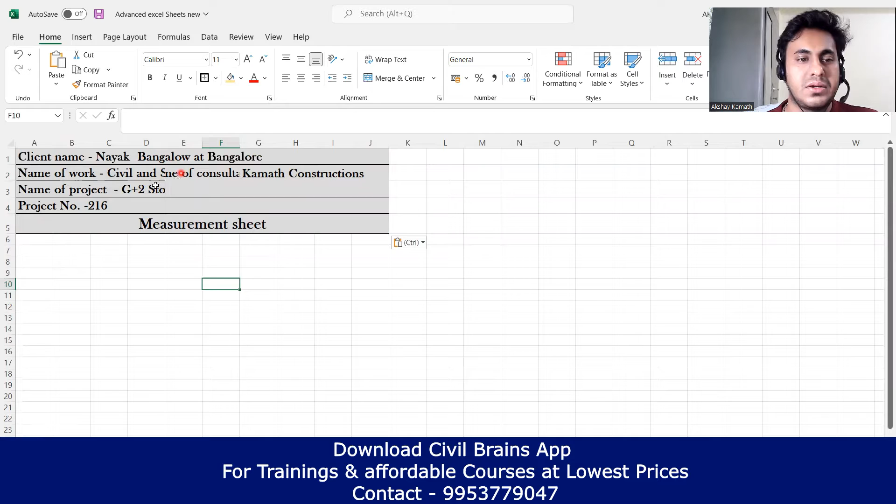I'll say Control C. I'll go to the new one. I'll say Control V. So everything will come here. You just have to pull it now. This part, then this part, and this part. Try to pull it so that it looks good. Yeah, I feel now it's okay. This much part you're supposed to do. Up to measurement sheet I've done.

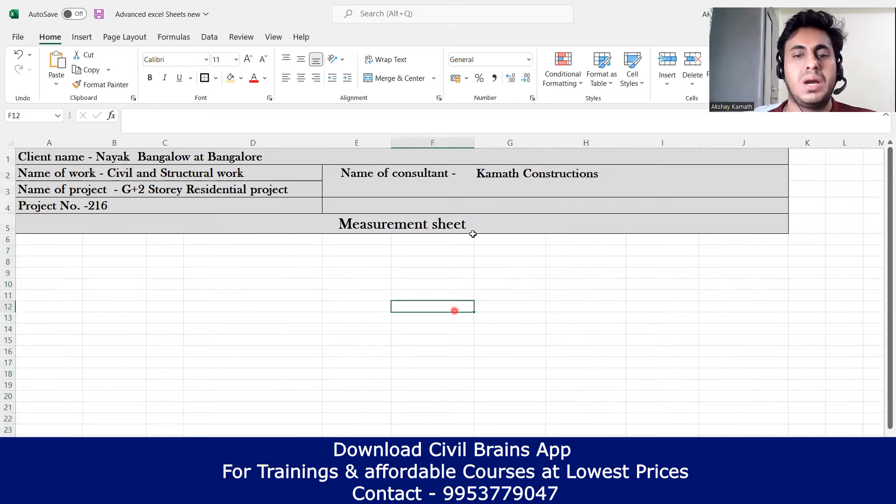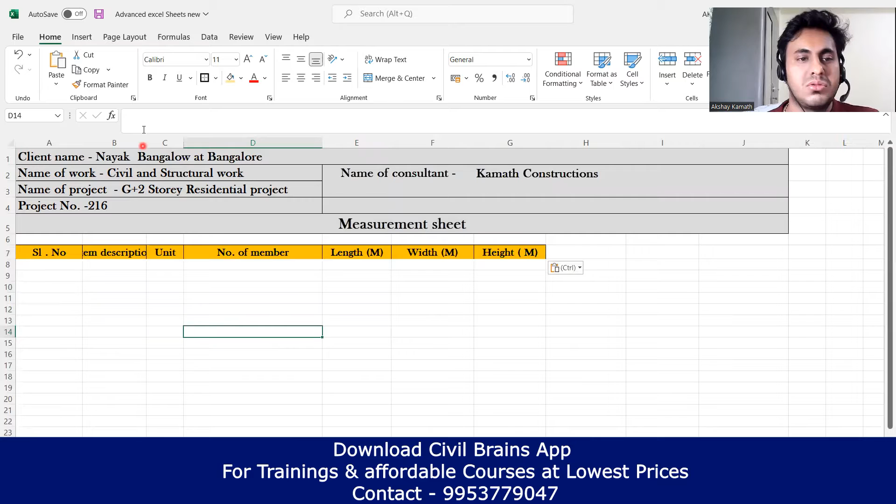So after that, you need to write down the same thing like you were doing before. Serial number, item description, unit, number of members, length, width, height. Up to here, it's the same thing. So I'll copy the same thing. You also can copy the same thing like what you have done. The quantity and total quantity is not required here. So this I need to drag a bit. Item description, unit, number of members, fine.

Now since we are finding the brickwork quantities, here we need to take care of a few things. One is you need to write area without deduction, then area after deduction, and total volume after deduction. Here you don't require quantity, total quantity. First, area without deduction, I'll write here. I'll tell you why it has to be done. This is area without deduction.

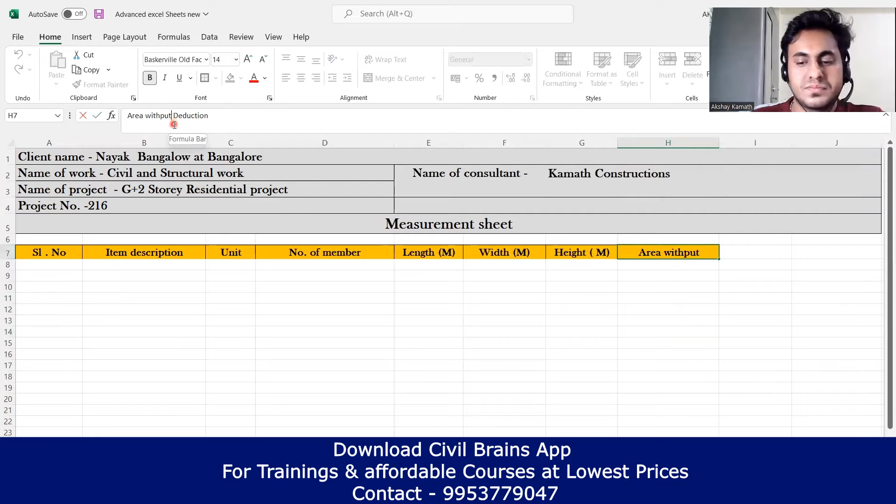So area without deduction is done. You can wrap the text also. This looks good. Next is area after deduction. One is without, next is after deduction. Wrap the text. And the last one is total volume, because here brickwork quantity we will find in volume. Total volume of brickwork. Make the brick spelling correct. Yeah, so total volume of brickwork.

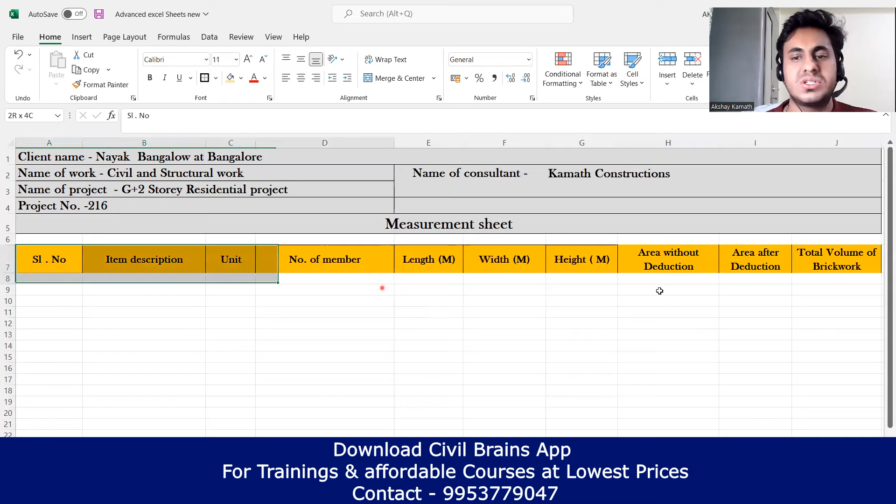So everything is good. Now you just select everything and give all borders so that every border will come. Now it looks good, right? So it's matching to the one I've done. So what you're supposed to do first, now I'll tell you.

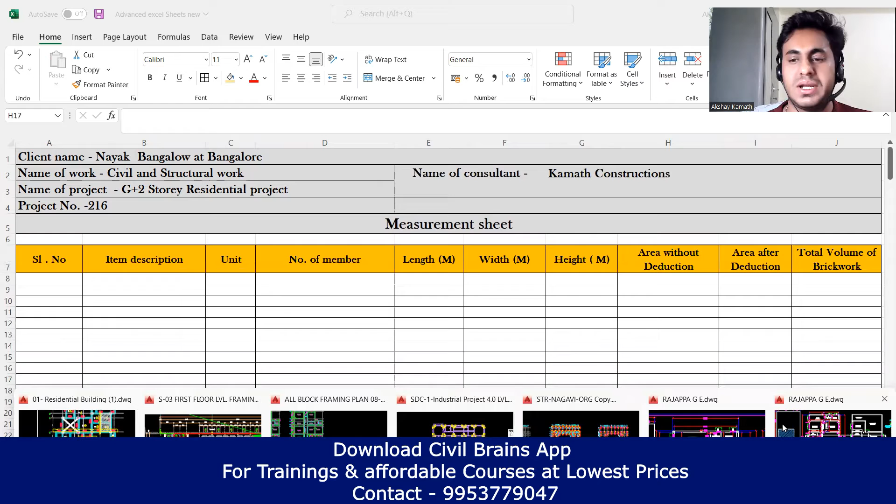Now for this particular thing, I won't take the same building which I had done for the quantity estimation, because that building will take a long time. That is why I've given one more building, which I'll be explaining, and I'll explain how to take out the quantities for this entire building. You can take the previous building as an assignment, but for your understanding, I'll teach on this so that it is easy and I can cover everything.

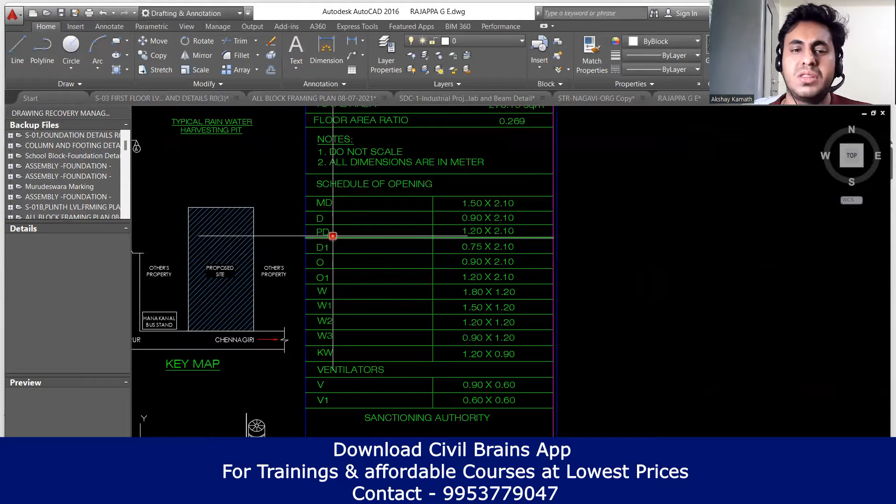And then you have a window everywhere. And if it is a kitchen, then you have a kitchen window. KW stands for kitchen window. Now the dimensions for the window will be given here. You can see MD stands for main door. This is the size of my main door. This is for door. PD is for puja door. D1 is door, which is 0.75 breadth, and height of your door is 2.1.

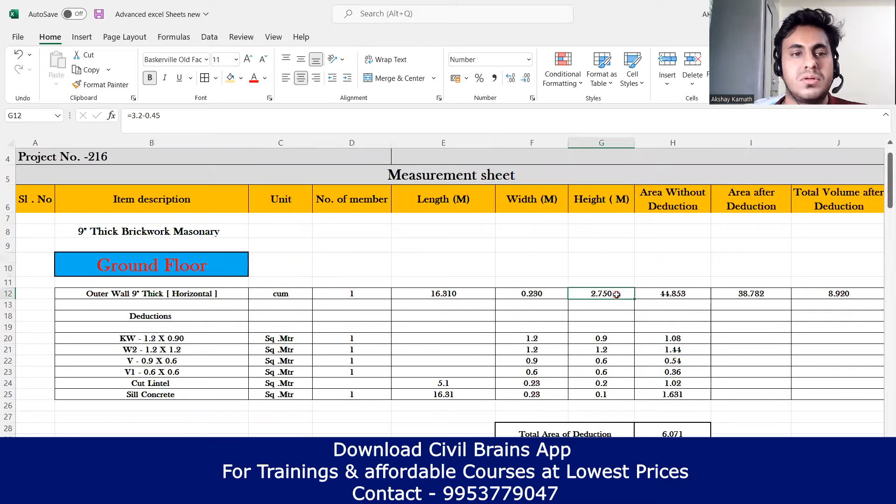Now I'll go with the ground floor portion. This includes the ground floor and the first floor. This particular thing is my ground floor.

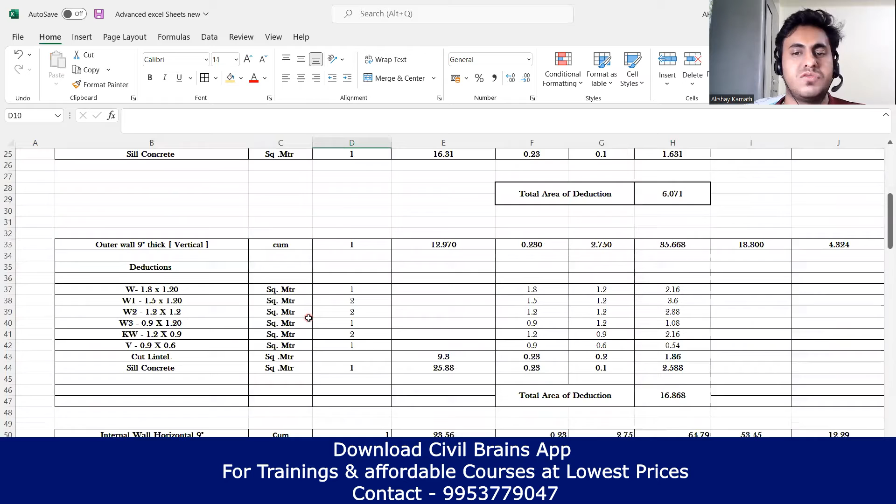Okay, first floor. Fine. I have taken it separately, the ground floor and the first floor, not an issue. Only the ground floor part I'm explaining now. So again, what you can do is come here and write it here, ground floor. You just have to write ground floor. Then give a color to this.

So after that, what are we supposed to do? You have to write this. First you write outer wall 9-inch thick horizontal. Come here and write outer wall 9-inch thick horizontal. Units will be in cubic meters, so write cubic meter. Number of members will be only one. Okay, this much is understood.

Now come to the length portion. So how do you calculate that? Up to here you are done: outer wall 9-inch thick, units in cubic meter, number of members is one. Now we'll find the running meter of this first. How we are supposed to do that, I'll explain here.

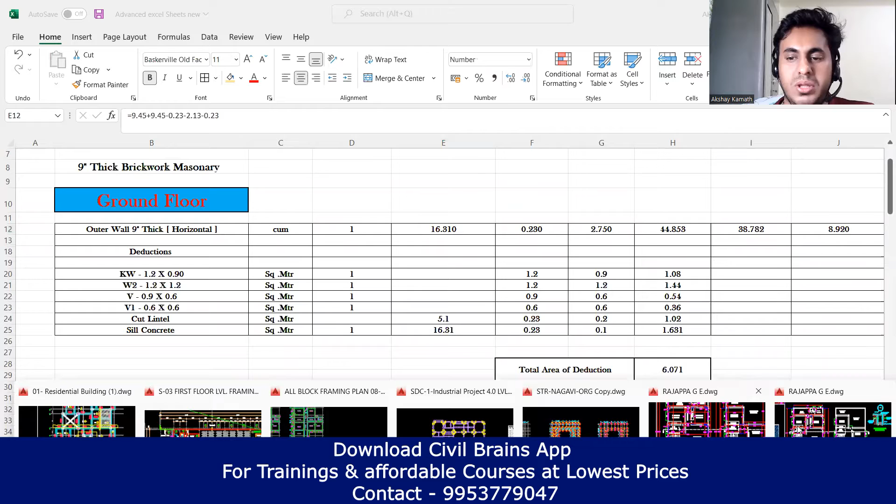So see, I'll go to the drawing part. Horizontally I'm taking. So where is your brickwork happening? This entire thing. Always brickwork will happen from column inner to column inner. So what is the distance from this column outer to this column outer? It is mentioned 9.45. So in the Excel sheet I'll write here 9.45.

So equal to sign, bracket open 9.45, plus. One horizontal is done. Now again come back here. This part I have covered. Horizontal only I want. Again here also I want, right? Your brickwork will happen here. Do you agree with me? This entire portion your brickwork will happen. Is it correct? Slightly it is incorrect.

Why? Brickwork will not happen in the entire portion. Brickwork will happen only from this column outer to this part. Why? Because here your main door is coming. When you're learning brickwork, you need to imagine. Since your main door is coming, that portion will be open, full height. So I'm not considering this particular length because there is no brickwork happening.

To put it in a better way, I'll show you one example. See here, this is that portion. This is your brickwork opening. My main door is coming complete height, let us consider. In that case, I have not taken the complete length. Only this length I am taking. Whatever length the door has, I am deducting that.

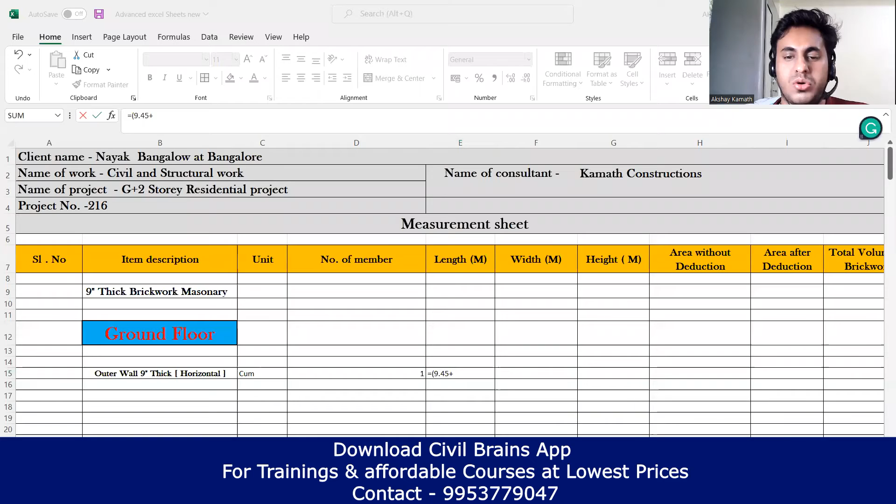You're getting my point. I'll go back to the drawing to make you understand. See this complete wall, this is main door, so here this will be the opening part. Your column will come here, but this entire portion will be open. You don't have any brickwork, so I'll not consider this length. The length from this column outer to this column outer is 7.32. So in the Excel sheet I'll enter 7.32.

Let me see what is there here. Yeah, I'll tell you how it has to be done. Okay, come. Anyhow, I'll explain here only.

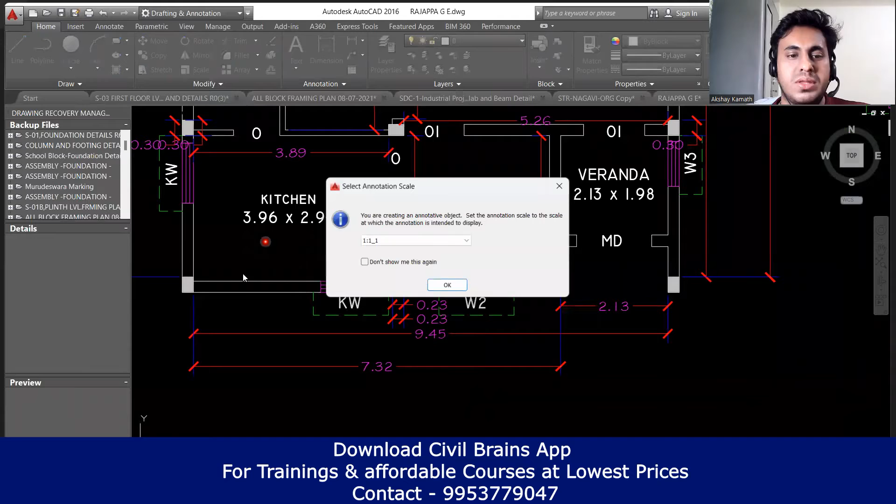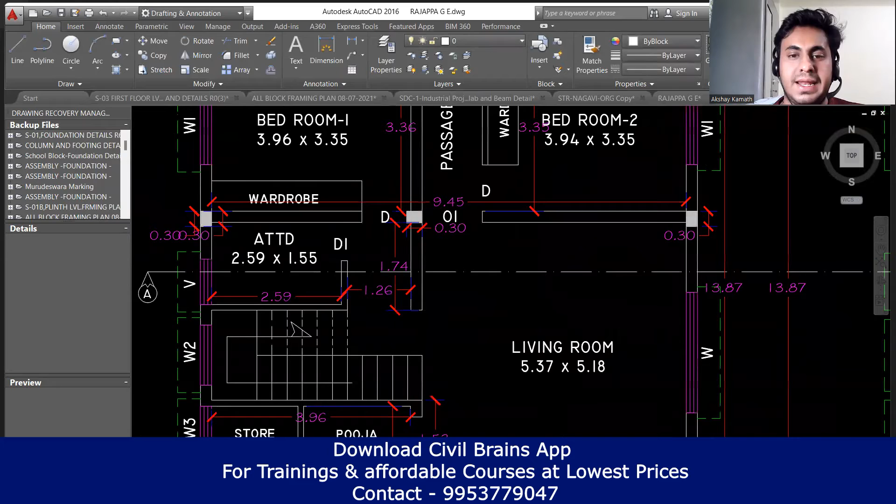See, here I've written 9.45. Why? I've taken 9.45 completely first, and then I removed that. From this outer to this outer it is 9.45. So in the Excel sheet, I've taken 9.45. Now, if you observe the drawing, this portion I told I need to deduct, I'll deduct it later. Don't worry.

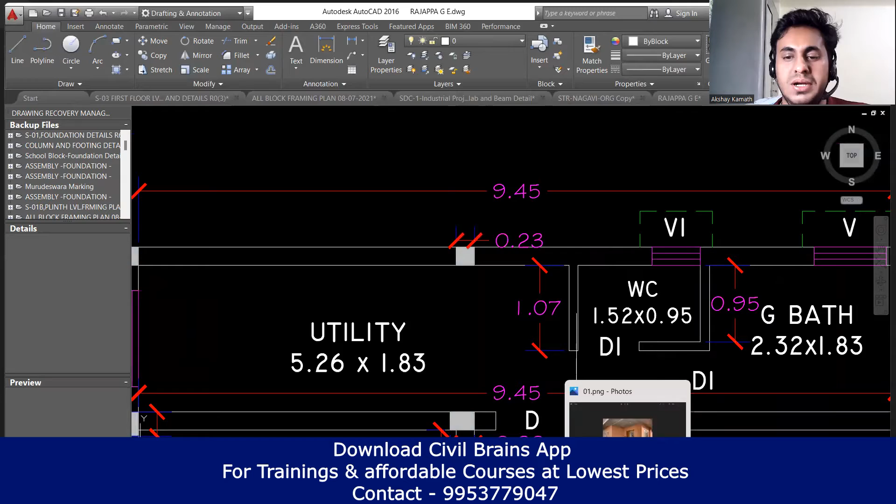Now, is your brickwork happening in the complete 9.45 meter length? No, absolutely not. Because in between, you have this column coming. Wherever there is a column, you'll not do the brickwork there. Very simple. For example, this is brickwork that has been done; you see there is a column coming. That means in this portion your brickwork won't happen.

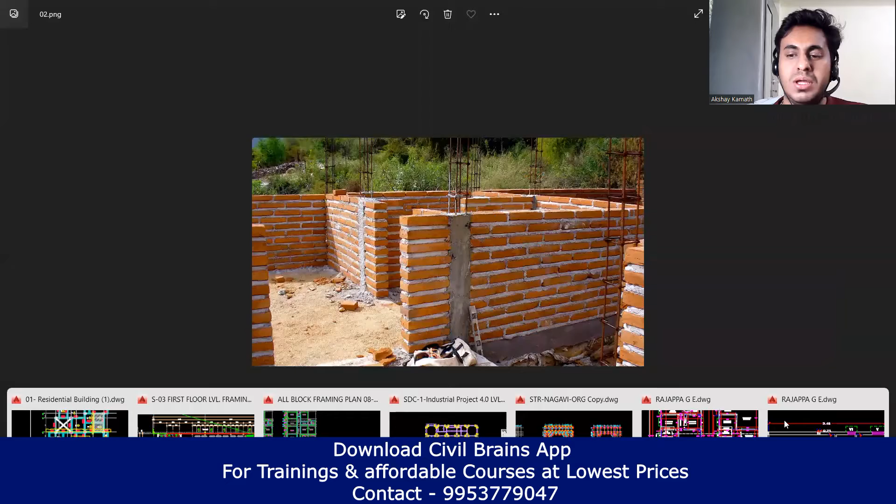That amount, whatever length we have, this I need to deduct. Very simple. So same thing I'm doing now. Okay, so here what is the width of your column? It is 0.23. I've taken a dimension from this column to this column. It is 0.23. So I'll go back to the Excel sheet. I'll deduct minus 0.23. Done.

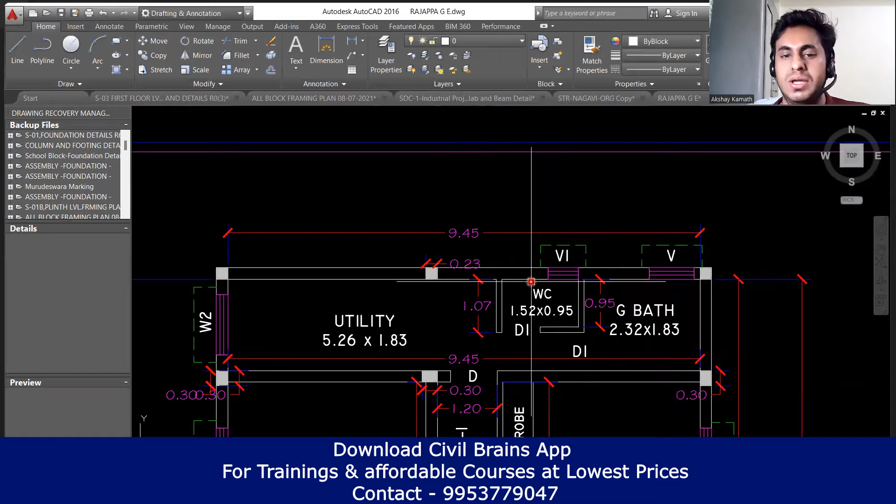Now again come back. So again, is there any other column which is obstructing my brickwork? No, this is our ventilator. They'll come at the later part, not now. Ventilator will not come now. Okay, so no problem. Now you come to this portion.

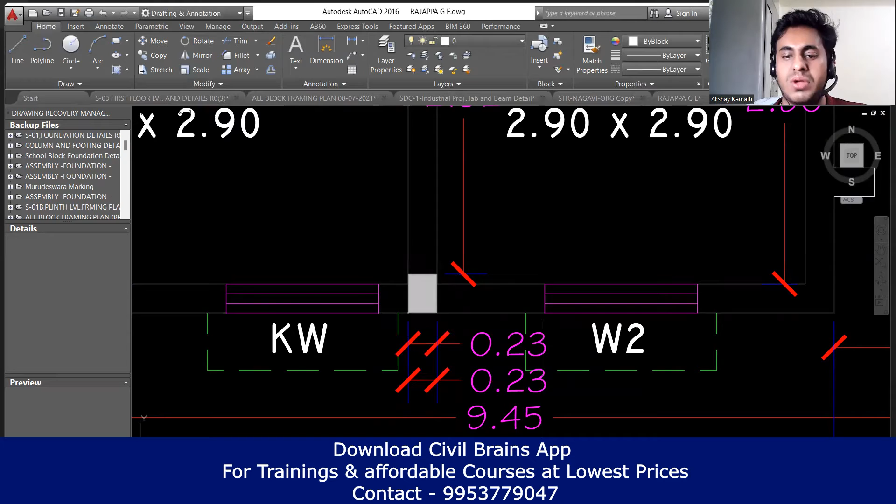Here, what all things I need to deduct? Again, you see from this end to this end. Is there anything which is obstructing this particular brickwork? Yes, this particular column is obstructing here. That means we need to deduct the width of this column. So what is this length? This length is 0.23. So again, I went here. I deducted 0.23. See, 0.23 is deducted.

Okay. The last who is left out? Last, this one is left out. What is the distance from this outer to this outer? Because here no brickwork will be done. So that is why initially I had taken completely 9.45. I could have even taken 7.32 and deducted this column. Then also I would have got the same answer. I'll prove it here. I took 9.45, the complete thing, and I'll deduct this particular column and also this length which is 2.13. So see in the Excel sheet I've written minus 2.13.

Okay. Now if you want I'll do it in front of you. See, 9.45 minus 2.13. You do it manually. Minus this part, 0.23. I'm getting 7.09, and if I just take this 7.32 also, I'll get the same answer. If I take from here to here, it is 7.32. 7.32 minus this width, 0.23. Then also I'm getting 7.09. It all depends on you how you want to take it.

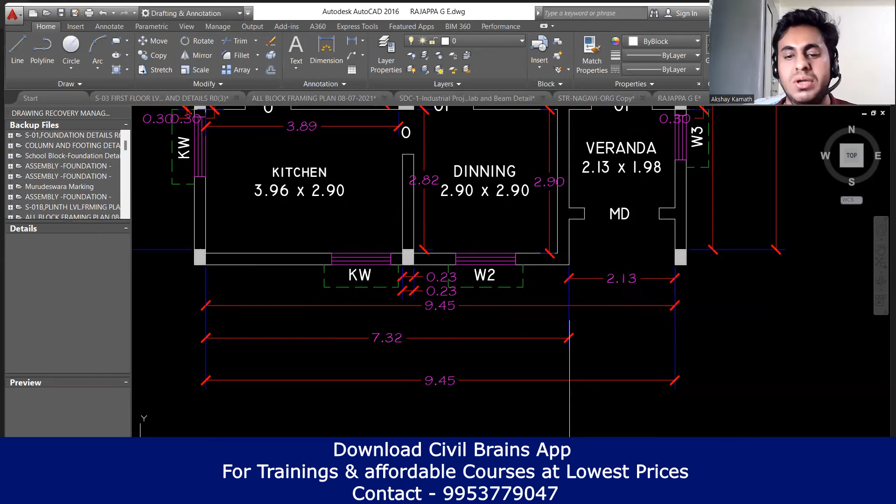Okay, understood? Let me know if you have any doubts here. Okay, fine. So that is why this becomes my complete perimeter. Now, how will the brickwork happen? I found the length. If I multiply this by the height, will I not get the total area of my brickwork? Pretty simple. Let us consider this length I got from here to here. If I multiply this length by the height of my brickwork, am I not going to get the complete area of this?

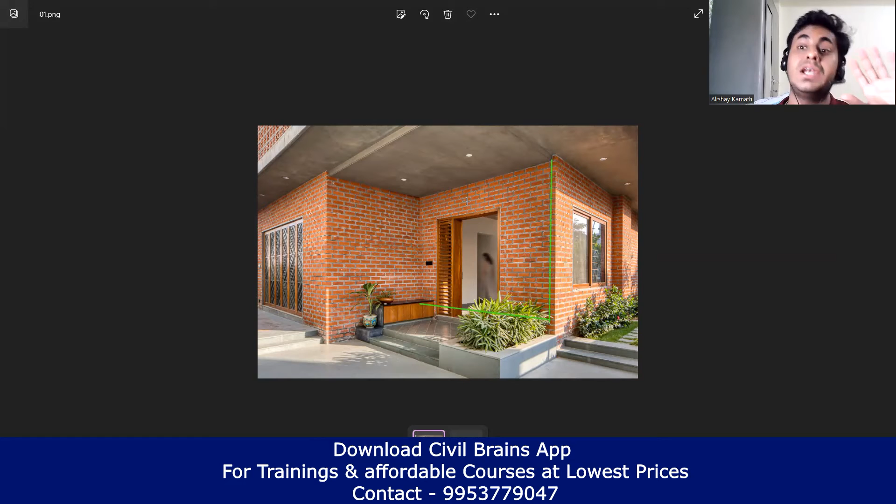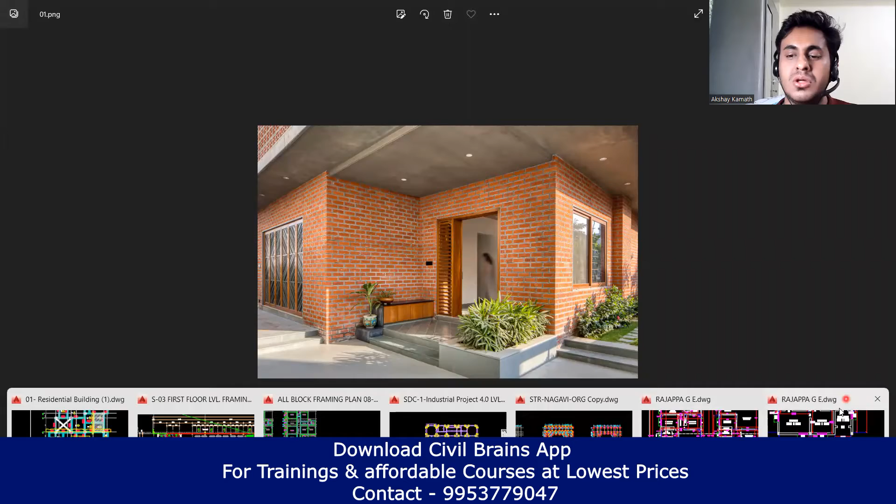Right now I'm getting the complete area. The deduction part I'll do later. But at least let us consider there is no opening. If I get this length and multiply it by the complete height, will I not get the area of my brickwork? Absolutely. We'll do the same thing now. But for that, you need to go to the section. Right now I'm doing only the ground floor. So this is my ground floor area.

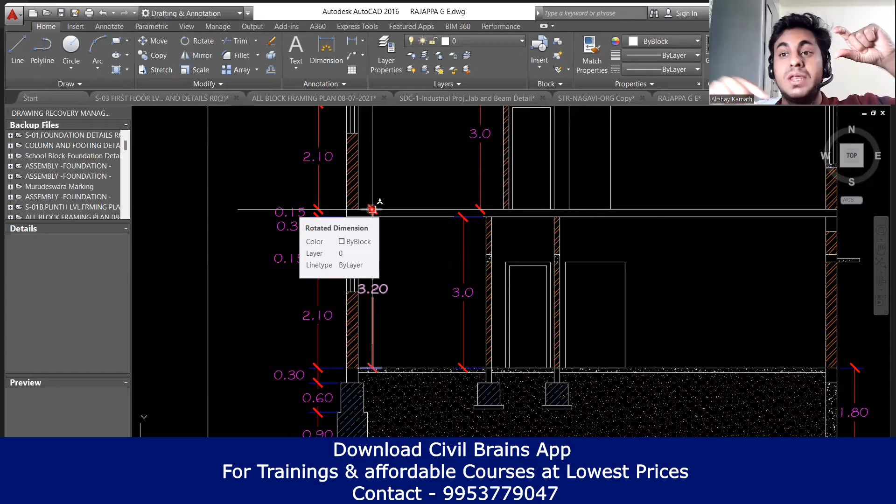Okay. So what is the height from the ground floor to the top of your first floor? What is your floor to floor height? It is 3.2 meter. But remember, the brickwork will be done till the beam bottom, right? If you're sitting in any of your rooms, you always see the brickwork happens till the beam bottom. So whatever is my floor to floor height, if I deduct the thickness of the beam, I'm going to get the height till where the brickwork should happen.

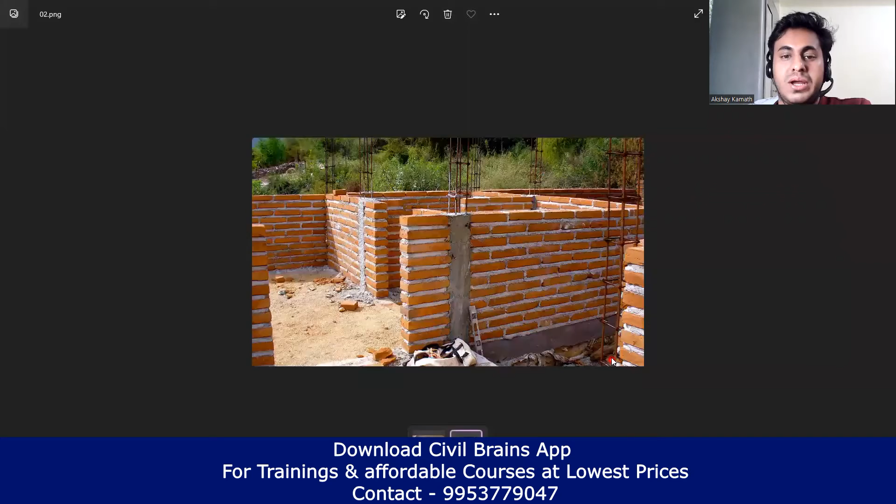To put it in a better way, let me see if I have any drawing here. Here I don't have any drawing, but no problem, I'll show you somewhere here. Yeah, this will be a good thing. Okay, see here. This is the floor to floor height, which was 3.2 meter in our case. But the brickwork will happen till the beam bottom. So floor to floor height minus the depth of my beam will give me the height of the brickwork. Agree with that? Very simple.

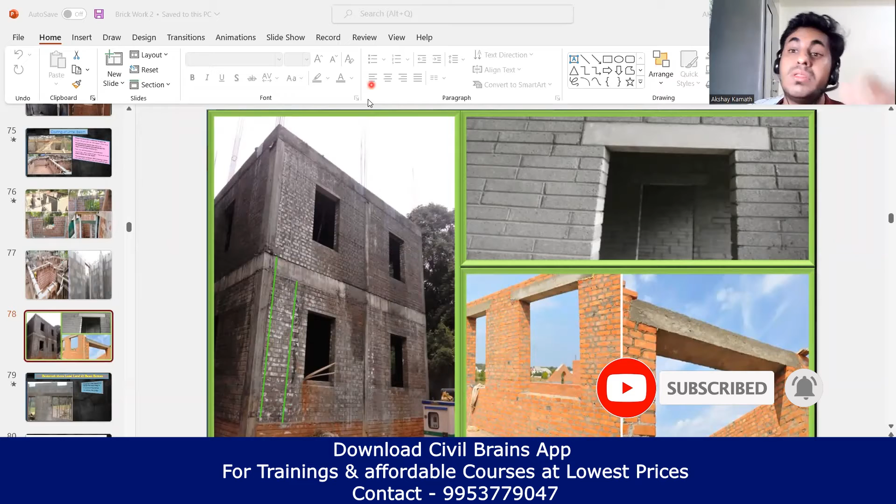Now what is the depth of your beam? In this particular project it is mentioned. See, come here. See this particular portion, you need to understand, you need to visualize. Okay, this portion is your slab, and this portion is your beam.

Of course this together will become a beam only, but at this particular junction, this will be a slab and this is a beam. Okay, so what is the thickness of a slab? It is 0.15 meter, which is 150 generally. And what is the depth of your beam? The overall depth of your beam is 450 actually. 0.3 plus 0.15 will be your 0.45, because beam depth is always inclusive of the slab thickness.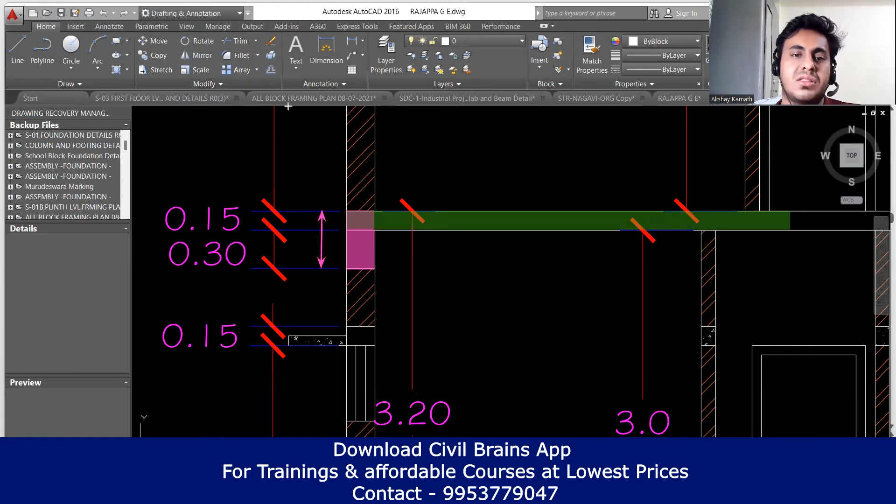So 0.3 plus 0.15. So what you're supposed to do, you directly take this height from the top of your slab till the beam bottom. What is the height? You just add 0.15 plus 0.3, which is 0.45. So 0.45 is your beam depth. So floor to floor height is how much? 3.2 meter. From 3.2 meter, if I deduct 0.45, I'll get the height of the brickwork to be done. Very simple. So I'll go back to the Excel sheet now.

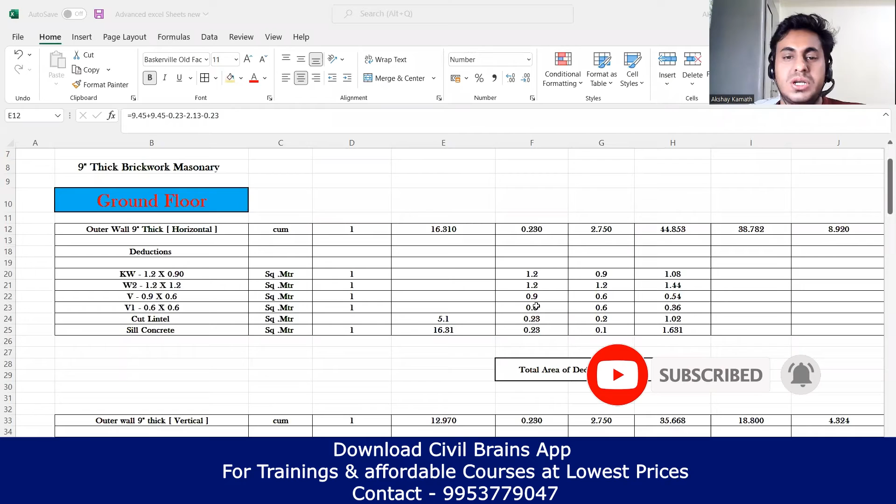So see here, what is the thickness of your brickwork? It is 230. So I've written 0.23 here. So let me freeze this particular thing. I'll go to View, and in the view I need to freeze panes. Okay, now it's okay. So it is 0.23. Now come to the height part. In height, you see 3.2 minus 0.45 I have done. So how much I'll get? I'll get 2.75. This is the height of your brickwork.

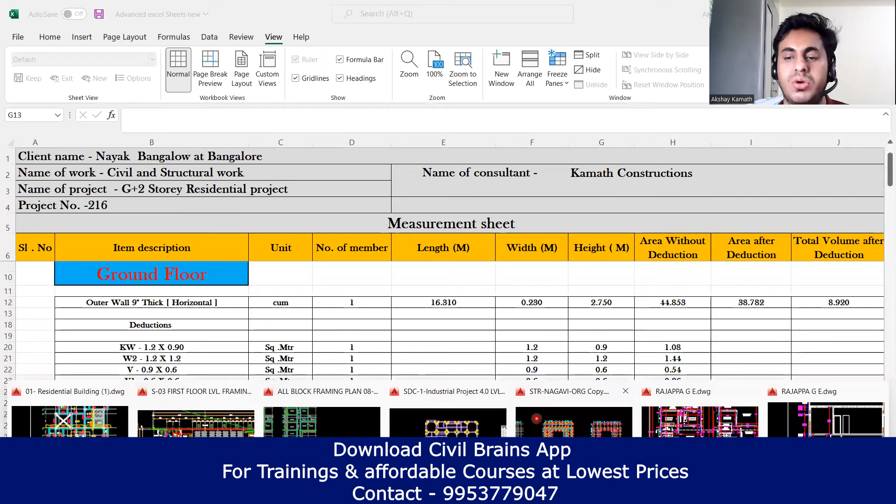Got it? Now you may ask me, sir, what you've done is correct, but let us consider this side whatever beams we have, the depth is 450, whereas in this side the beam is 300. In that case our calculation will go wrong. Exactly, your calculation will go wrong. In that case, either you can take the average or you take the beam which is of lower depth.

Now understand the concept. If you want to do it accurately, then you need to separate out this part, take the height, separate out this part again, and it will become a very long Excel sheet. Instead of that, even if there is a difference in the beam depth, if this is 450 and this is 300, one thing you need to understand, we are doing quantity estimation, we are not doing the exact quantity, but in 95% of the cases it will match. So when you do quantity estimation, you should try to be safer. You should try to go on a little higher side. You getting my point?

Let us say on site 50 bricks are required. But when you do the estimation, try to do it for 54 or 55. When you do the wastage and all, it will come to 50 only. In the same way, I can take 0.45 or 0.3. Which one are you going to take? You can take the lower one, because if you take the lower one, the number of bricks will increase. See, if my floor to floor height is 3.2 meter and one side is 0.45, the height will be 3.2 minus 0.45, so 2.75 meter.

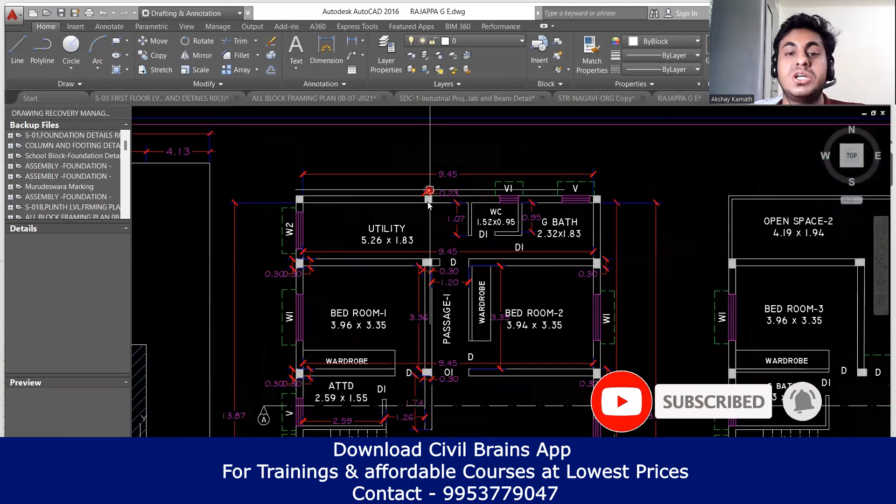So what I'm doing, I'm considering here everywhere 0.45. In this project, we don't have a problem. But in case in your project, if you see my previous drawing, in the plinth level, all your beam depth was 0.35. When you go to the first floor, there are some 300, some 400, some 500 depth.

In that case, you can't keep on checking those beams where 500 is coming, 400 is coming and all. Take the lower one, do the estimation, doesn't matter. Your answer will be on the higher side only. Same thing in the structural design also, we do the same thing.

You have seen my ETABS course. If my load is 11.73 on the beam, I consider that to be 12 kilonewton. I don't exactly put 11.73. I'll go on the higher side, doesn't matter. Always as civil engineers, we need to try to make our structure economical, and we have to be on the safer side. So for the safer side, take the lower depth.

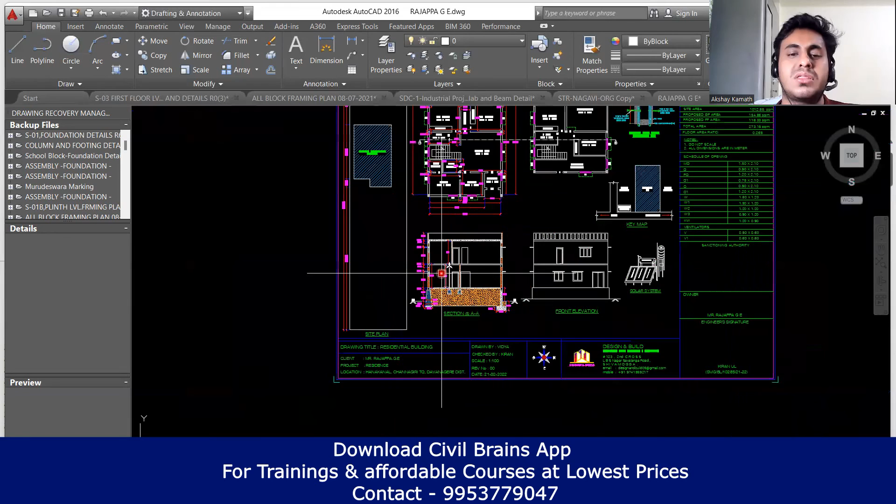But here we don't have a problem, because here in the section itself, all the beams are 450. But sometimes if such a scenario comes, go for the lower depth. I'll give one quick example. I have a beam depth of 500, 400, 300. Which one are you going to take? Obviously, you take 300.

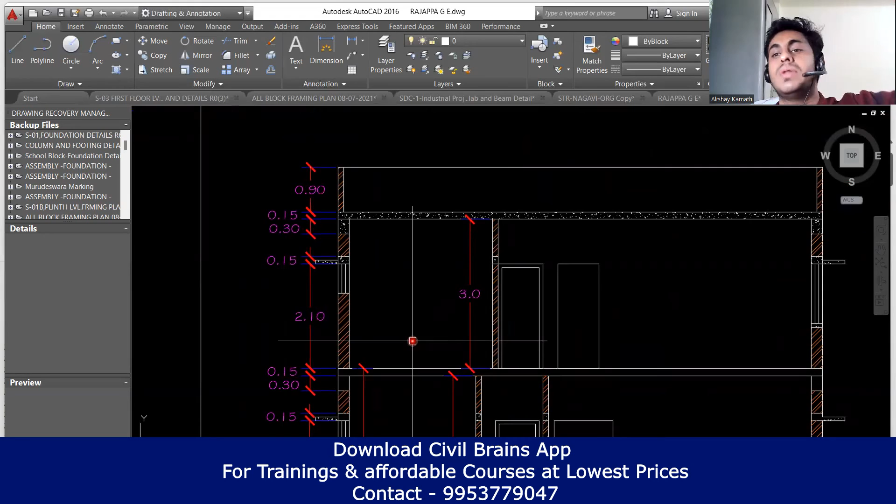Floor to floor height is 3.2 meter, let us consider. You take for 300 mm. That is, 2.9 will be the height of your brickwork, and you do the estimation throughout. No problem. That's how you're supposed to do it. So that is why I've done it here. How much have I taken? 0.45.

Now next is area without deduction. That means so far I haven't done the deduction for the windows and all. So simply you take your length and multiply by the height. I'll do it here. Equal to sign. What is the length? That is the perimeter, 16.310. You multiply this length by height, 2.75. So you'll get 44.853 square meter.

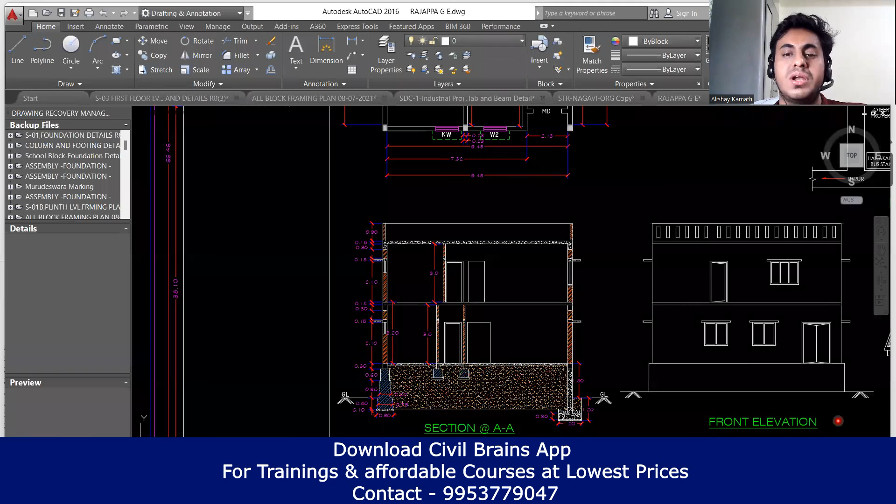But this is not the real brickwork area. Why? Because in this particular drawing, there are a lot of deductions you're supposed to do. What are the deductions? You see, you have a ventilator coming, VV. You have a kitchen window coming. You have window 2 coming. Then you have a lintel also going to come.

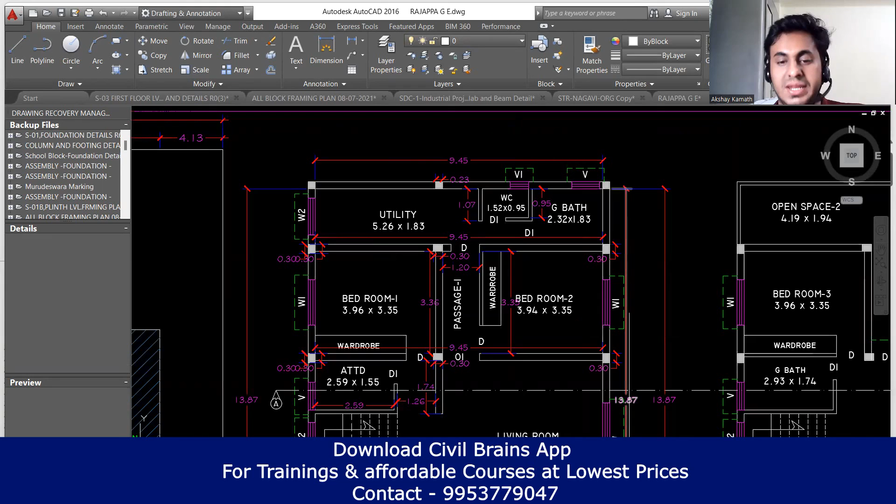You know what a lintel is. Then the sill concrete is also going to come. So all these deductions we need to do, and only then we'll get the exact brickwork quantity. In the next lecture, I'll explain how this deduction has to be taken care of: kitchen window, window, lintel and sill concrete.

And after that, this is the total area of deduction. So my total area after deduction will be the total area I got minus the deduction, that is 44 minus 6, which will come out to 38. So this is the real brickwork area. In the next lecture, I'll explain how this deduction has to be taken care of.

We'll see you back in the next lecture. Try to do the Excel sheet up to here. I explained only up to here, but I hope you're in a position to do all these things up to here. Try to do that. In the next lecture, I'll explain the further things.